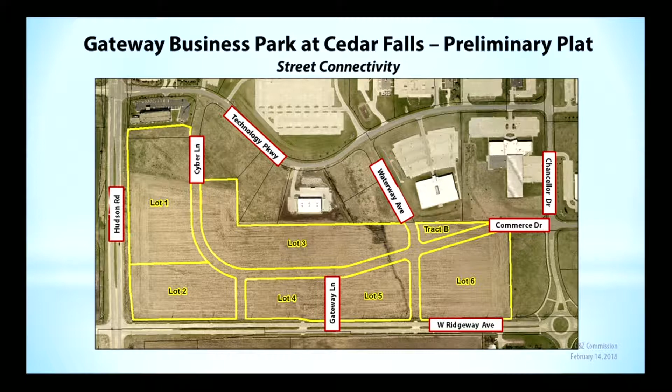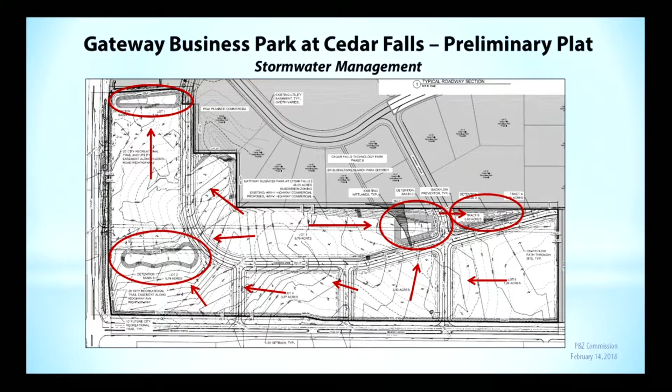So at this time, this is just a preliminary plat, which would get them started on some of the road improvements. You'll see later in the agenda a site plan for one of these lots for a hotel development. At this point, it would be staff's recommendation to approve this preliminary plat.

One thing we are working with the developer on is those access points along West Ridgeway Avenue, looking at the possibility of doing roundabouts at one or more of those intersections. Right now they're shown as full access intersections. If a roundabout is determined feasible, we might need some additional right-of-way. We haven't gotten to that point yet, but that's something we are studying. So if we do need additional right-of-way, we'll do that before this plat moves on to City Council.

Any immediate questions? What's the reasoning for thinking it may need a roundabout, or why is one preferred? It doesn't look like it's really a necessary item, just from my looking at it.

I think it's just looking out into the future. We're trying to look at the future roadway. The city owns all that land to the south, which we would like to develop sometime in the near future as well. So we anticipate this corridor to become a busier road network, almost like a University Avenue, so we're looking at, with the access the city may need into their lots to the south, does a roundabout make sense?

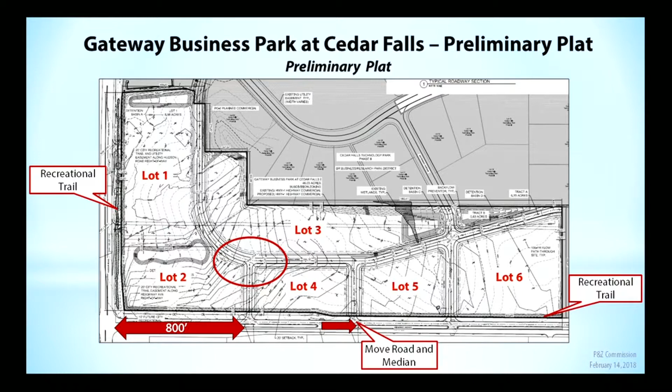On this slide, where I have the circle between Lot 2 and Lot 4 - back last month when we introduced the plat, that intersection was shown about 150 feet further to the west, and there was a roundabout there. Because they had to shift that east due to the city engineer's recommendation on that street moving further, they decided to go with a standard intersection at that location.

Okay, all right. I'll ask if there's an applicant present, if they would like to address the commission at all. We'll then open it up if there's anyone who would like to make any public comments on this item. Seeing none, any other questions, comments from the commission? Further discussion?

I'd make a motion to approve. There's a motion to approve. Is there a second? I'll second. There's a motion and a second. Let's go ahead and vote. We have all ayes. That item is approved and will recommend approval, and it will move on to City Council.

Moving into our new business agenda items. Our first agenda item is regarding the CBD overlay, and Carol Lilly from Community Main Street. Hi, thanks for having me.

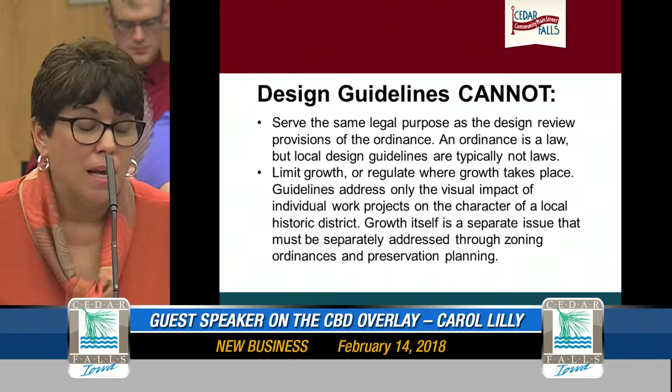Guidelines cannot control how a space is used when it's built. They deal only with the exterior, publicly visible portions of buildings, not with how the interior space is laid out or used. The guidelines cannot guarantee that all new construction will be compatible with the historic area, or guarantee that creativity essential to good design is used to be sensitive to the environment. And they cannot guarantee high-quality construction.

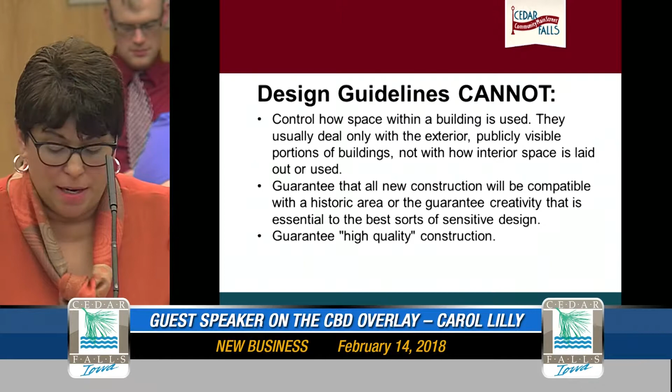As you update the overlay ordinance, I encourage the Commission members to consider how the guidelines have helped shape our successful downtown.

Updating the ordinance can remove confusion by specifying which categories of information must be used and which are only advisory. Community Main Street remains committed to working with city staff, community stakeholders, both big and small, and the citizens of Cedar Falls to ensure that we provide a business climate in which all aspects of our business mix can thrive. If you have any questions, I'd be happy to answer them, but just want to be a partner in continuing to help with the overlay ordinance process. So, thank you.

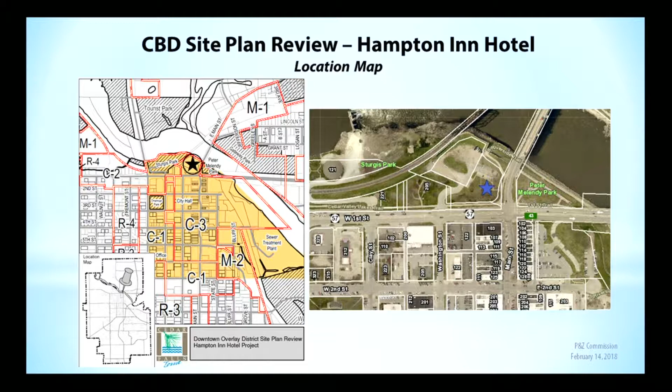Thank you, Mrs. Lilly. I'd like to introduce this next item. It's for the new Hampton Inn Hotel project at the corner of Main and First Street, where the old chamber site building is located. Basically, this is a downtown overlay district. We look at site plan review elements, building design elements, and other features relating to this site. The property is in a C3 commercial district, at the northwest corner of Main and First Street.

Just want to start with a little background on this site. It was the old broom factory. It was demolished in the winter of 2008, early 2008. At that time, the property owner ran through a couple ideas for a mixed-use building at that site, shown in the upper left corner of that picture on the slide there. They had plans for Riverview Gardens, a 5 to 6 story mixed-use building.

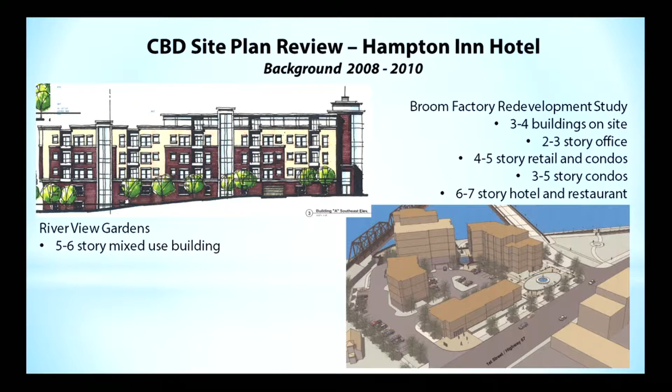I think Mr. Holtz was on the commission at that time. We ran that through a couple times and really didn't act on it. We tabled it in the spring of that year, and then the council took on this project and hired a consultant out of Madison, Wisconsin to take a look at this 2-acre site to see what could go on there. We did a quick little study on that, shown in the lower right-hand corner of this slide. It showed a mixture of mixed-use buildings on this site from 2 to 3 stories of office and retail up to 6 to 7 story hotel and restaurant type features. So that was part of those planning documents back in that time.

Moving along the next couple of years from 2010 to 2012, as the State Street development property was underway and developing that master plan, the property owner purchased that site from the owner of the broom factory and amended that State Street plan, creating this Riverwalk redevelopment plan. The city entered into a developmental agreement with that property owner in 2012, which identified a couple more buildings there for townhomes and condos on that corner site down by the intersection - 3 to 4 story townhomes, and then toward the railroad bridge a taller building with a mixture of condos and other types of development. That worked its way through the early years of this development, about 4 years.

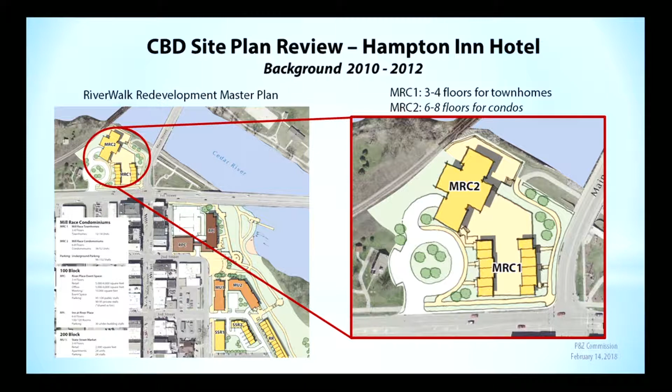Then moving along, Eagle View partners teamed up with Western Home to look at possibly another type of senior facility unit down there. They really looked at that site and eventually turned their focus to the south side of town, where we had the Jorgensen Plaza site plan review, which is under construction now. So they basically looked at moving away from that site, which brings us up to what we have here now for the proposed Hampton Inn hotel.

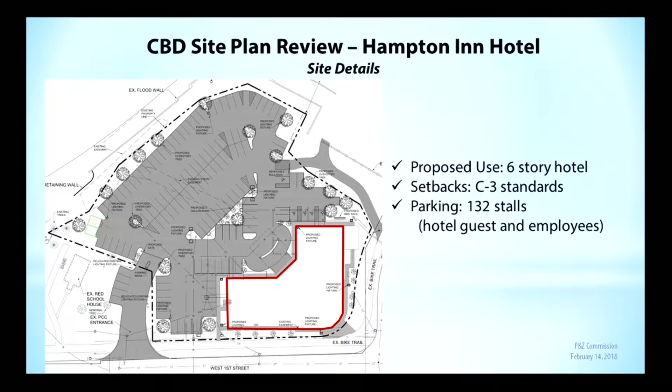The building is moved closer to that intersection - it's a 6-story hotel in the C3 district. It meets all the setbacks for that district, and also for parking. The parking is identified behind the hotel, up along the railroad tracks and the flood wall. They have 132 stalls with access off of First Street, which applies to how many guest rooms and employees there are, so that meets those requirements for parking. Moving along to some site plan elements around the site, we have the flood wall along the railroad on the northwest and around the north side of it.

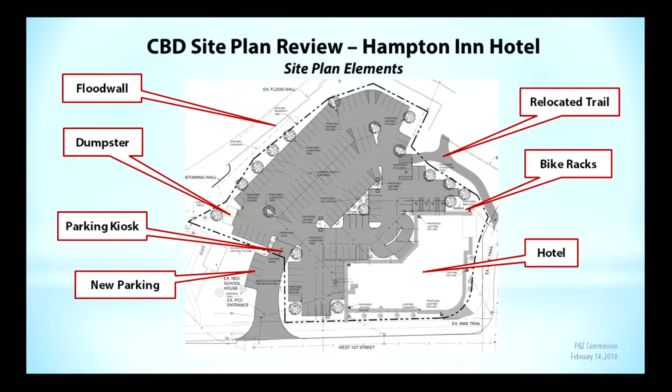The dumpster is located behind the Little Red Schoolhouse. The parking lot at the north end of that driveway will be accessed with a parking kiosk, so as you approach it you'll enter your information and they'll let you in, probably using a key card. Along the west side of that driveway there will be 5 additional stalls, not part of the hotel site, but tied more into parking for the Little Red Schoolhouse, added to the new driveway.

Moving along, the hotel is in the southeast corner of the site. Along the north side of the building, up along Main Street, there's a place for bike racks they intend to put in. Then there's the trail along the corner that ties in around the flood wall, with everything connected via trails and sidewalks into the site.

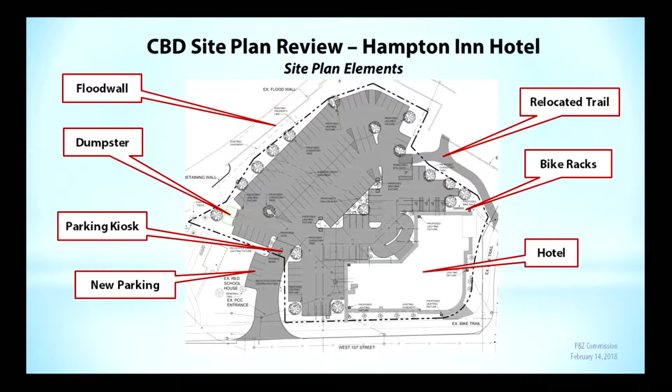Moving along with landscaping, we look at perimeter landscaping, parking lot landscaping, and screening from right-of-ways or nearby streets for this district. There are exceptions to the code when parking is behind the building and there are no adjacent properties to screen. That exception applies here along the flood levee, where trees on the northwest edge of the parking lot will be combined with a berm and a wall, so the wall becomes the screening.

Looking at the area along First Street, we identified a possibility of adding some shrubs. There are a couple trees on both ends of the parking stalls just east of the driveway, and we wanted to add shrubs there for additional screening along First Street. With that, the landscaping is satisfactory to the code, and there are other shrubs in parking lot islands around the lot and hotel site.

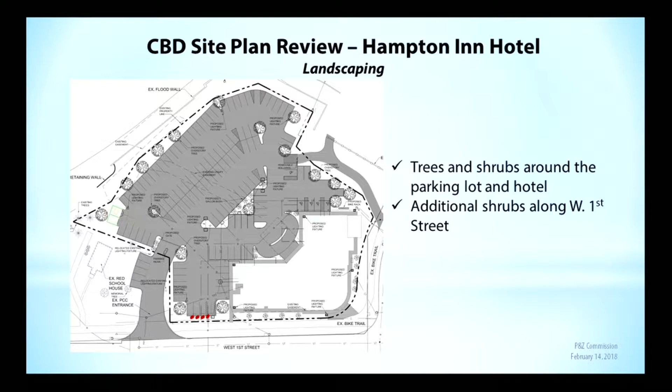Moving along to site access, the photo on the right shows the existing driveway, which curves into the old chamber site. As part of this project, they're going to change that driveway and straighten it out a bit off of First Street, as shown by the arrow. Since this is the only access to the site, the fire department requested an emergency exit.

That emergency exit is identified by the dashed line along the trail. The trail has to be reconstructed for the flood wall project, so the applicant will rebuild it wider with thicker concrete to support emergency vehicles if needed. Basically, a fire truck would enter the site but have no way to come around and exit onto First Street.

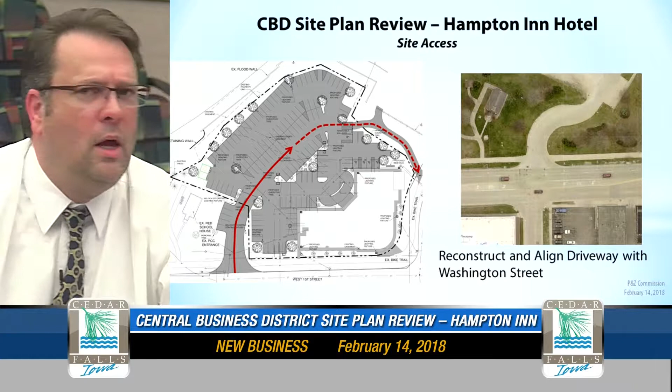So the idea is to install removable bollards at the edge of the parking lot where it ties into the trail, keeping that access closed until an emergency occurs. If a fire truck blocks the driveway, this will allow other people to exit the site in that situation.

Moving back to the driveway along First Street, the petitioner will rebuild it, and our recommendation is that the driveway be shifted a little to the west so it lines up better with Washington Street. On the previous aerial you can see the north side is a bit offline, so we want it moved west to line up properly, and since they're rebuilding it anyway, we want them to make those arrangements during construction.

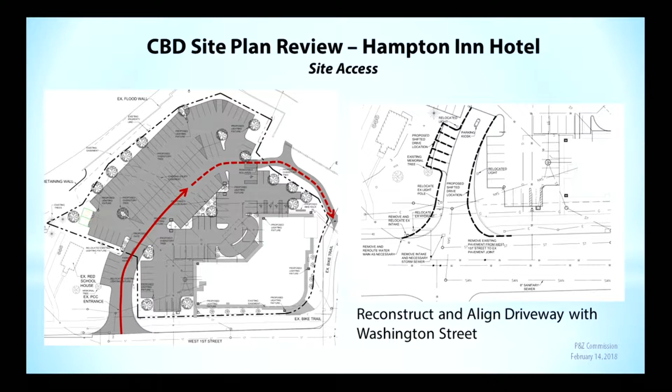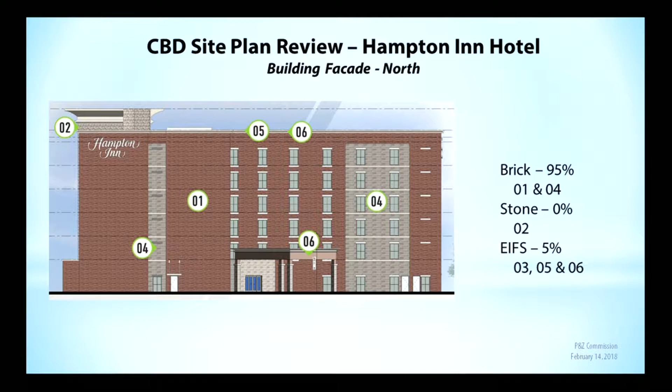These are the perspectives of the proposed hotel. The bottom picture is facing the corner at 1st and Main, and it has a nice little corner feature, a curved feature, where you'd have a pedestrian entry in the corner that accesses the rest of the parkade area.

They provide a nice contrasting color for the bricks and other materials. The raised and recessed facade treatments really pop out to identify those different colors. The windows have precast lintels above each window, sills, and horizontal banding at the bottom of the windows. The parapet is topped with a cornice feature around the top of the building.

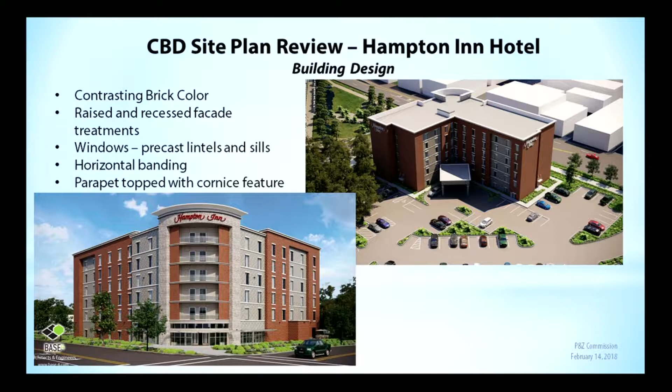Again, the back of the building, as you enter the parking lot, there's the canopy there for the entry.

The architect provided a height analysis of this building in relation to the other buildings in the downtown area. The general height of the building is roughly 69 feet, that's the top of the parapet wall. If you go to the top of that turret it's a little bit higher, but in general I'd say it's 6 stories, 69 feet, and the other buildings are generally 4 to 5 stories, as depicted here - you had the Oster Theater, Black Hawk, and the River Place.

Just outside the pictures, the Joker's building or 4th and Main building is similar to the Black Hawk Hotel. So on average, this is roughly 14 feet taller than the hotel. It does kind of go back to that Riverview master plan I mentioned earlier about a potential 6 to 8 story building on that site, so it follows that with a hotel idea for that corner.

Just moving along with site lighting elements, the LED lights are identified in red. Those are identical to the lights that were put into the 100 block parking lot behind the 100 block on Main Street, the new one.

The petitioner plans to add some antique lights around the building and run it down First Street, which ties into the streetscape plan we have downtown on First Street - a series of single head antique lights from the Little Red Schoolhouse west to Center Street in front of the Ice House, but then there's nothing really from the driveway down to Main Street. So 2 additional lights will carry that plan through.

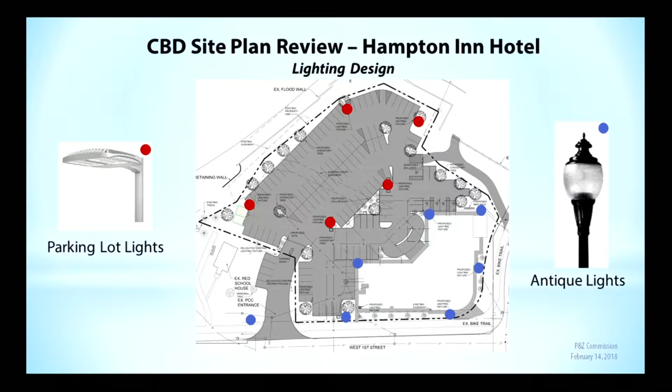The existing driveway has 3 double headlights, and those lights will be removed and replaced as part of that driveway change. So that carries through with the streetscape plan.

Just want to go over what's going on with the levee. The wall there is along the railroad and the north side of the site. The levee project is underway right now, and they're adding additional height to the existing wall features, wall structures, and earthen berms along the south side of the river.

Essentially it's going to be 2 additional feet for that wall height, I believe, so it'll protect for larger flood events, from 100-year to 500-year flood events. Right now we have an existing easement there for the site to store materials, stage materials, and I believe that runs to the end of June. So the idea is for the contractors to get in there and get out by that time.

Later in the presentation, Iris is going to talk a little bit about the chamber building relocation. In the spring you'll see a lot of activity down there - I think there's some stockpile material down there now.

So the idea is get that buttoned up when the chamber building leaves, and then if the hotel is constructed at this site here later this spring and summer, once that's done, the hotel again will come in, their grades will match the existing.

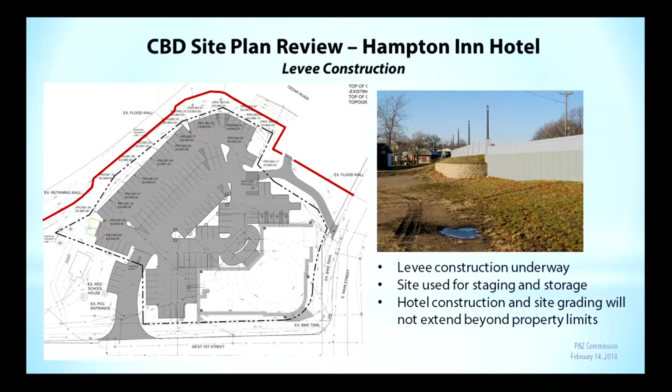We don't want them to mess with the toe of the berm. It's a berm there on the back, as you can see on that picture, that goes up to the wall. So that will all be graded out, and there's a couple tenths of grade difference between the back sides of the new parking lot to the existing grade, and that could be blended in. There's roughly 15 to 25 feet of green space north there between the edge of the parking lot and the wall that will work out very fine.

Moving along to stormwater management, everything's going to be underground here as part of the parking lot design. There's going to be some inlets installed, and that will collect all the parking lot runoff and the roof drains, so you'll see the arrows go into all those inlet structures. The dotted dash lines indicate the underground flow of the stormwater, and eventually it'll go into a water quality control system that catches all the debris, filters it out, and then that will be released into the storm sewer.

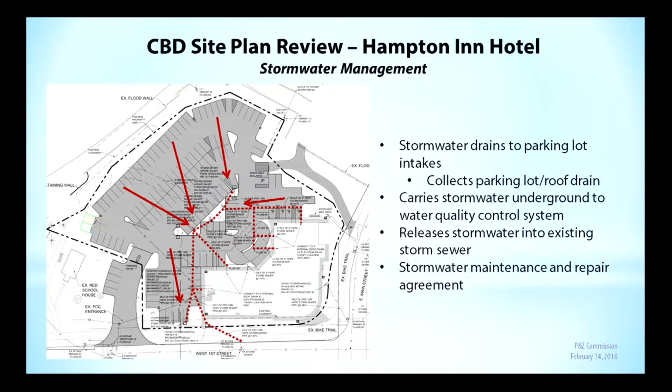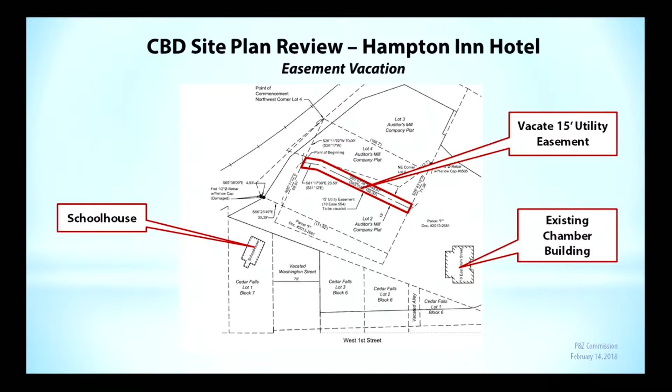Easement vacation - seems like a lot of these projects lately, we've had site plans that involve easement vacations - there's a utility easement that runs through the middle of the site. As you can see in relation to the schoolhouse and the existing chamber building, it's a 15-foot wide easement that will be vacated. I believe Mediacom's the only utility in this area, and they've been notified, and they have plans to move that utility in anticipation of this construction. So we'll have to vacate that easement as part of this project.

So basically wanted to hear your comments and just introduce this. We have the applicant and the engineer here for any additional comments, but want to hear what you guys have to say, and then just a couple other stipulations - again, the additional landscaping along First Street, and give us an idea of what the dumpster enclosure looks like. If you remember on the site plan, that's behind the Little Red Schoolhouse. We'd like to have an enclosure plan to maybe match the design, materials, and color of the building.

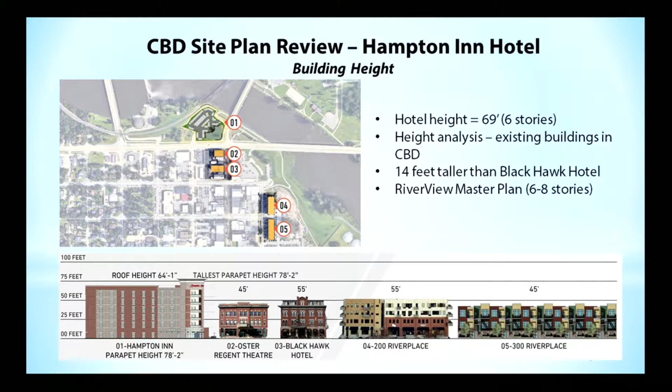So 14 feet is going to be pretty distinctive and is really going to stand out, but 14 is probably not over the top. If you look at that, that's kind of the roof height, then you add the parapet wall to it, which adds a little more height.

It does have the distinction of being across the street from the main downtown, because First Street's a bit of a barrier as it goes through there. Yeah, it lengthens Main Street for us. I like that.

So the customer drop-off point isn't on Main and First, it's around the backside where that canopy is. That was one of the first ideas, possibly having a customer drop-off on First Street. We looked at that location, the distance from Main Street, and it being a DOT roadway too. They changed their plan to come in behind the building for that canopy drop-off area. But that works its way through the lobby up to that corner on Main Street, as a pedestrian flow to make that connection down to the parkade. So vehicles would go around behind the building. That's not a very good place to stop.

In regards to discussions of using the river for more recreational purposes, and certainly having the hotel here would be beneficial, are we taking that into account with the site plan for what we might, as a city, as a community, want to be able to offer for recreation regarding the river?

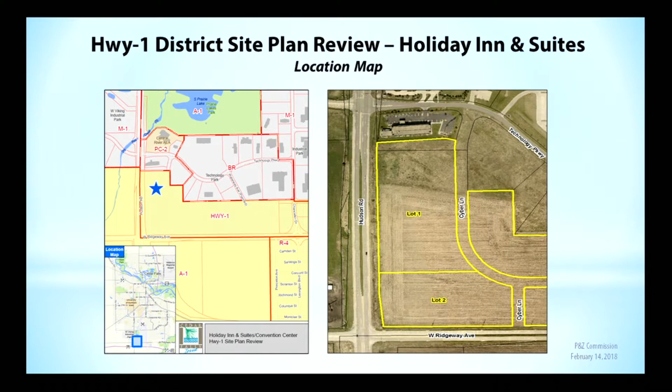This was in relation to the first item on the agenda, the Gateway Business Park plat. So this is a site plan now for Lot 1 of that plat, which would have frontage along Hudson Road and Cyber Lane, just south of Technology Parkway. This property is zoned Highway 1 district, and it's also located within our Highway 20 Commercial Corridor Overlay District. The site is about 9 acres in size, and they're proposing a 4-story, 126-room hotel with an attached 31,000 square foot conference center.

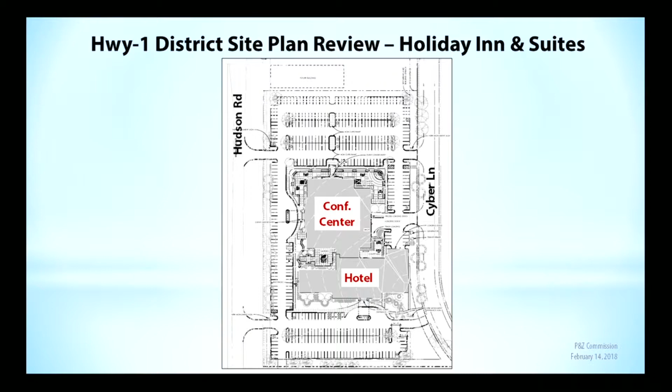Looking at the site plan itself, we've got the hotel on the south side of the property, and the conference center on the north side - 31,000 square feet, 4-story hotel. You can see some of the site elements here, starting with the upper left: they are showing room up on the north side of the property for a future hotel, and additional parking stalls - 76 parking stalls at the north side of the parking lot - for that future hotel.

There is a recreational trail, as was mentioned during the preliminary plat, along Hudson Road, with a trail connection down at the southwest corner of the property so you can easily get off the recreational trail and enter the site instead of having to use the driveway. The conference center's main entrance will be along the west side of the building, and the hotel's main entrance will be on the south side. Both will have drive-up canopies.

There is a location for bicycle racks on the west side of the hotel, near that trail connection, so it blends that together with a spot to park your bicycle. There's a typical 5-foot sidewalk along Cyber Lane, required per the subdivision ordinance. The trash dumpster is going to be located inside the conference center building, with an overhead door on the east side that will have the trash enclosure within it.

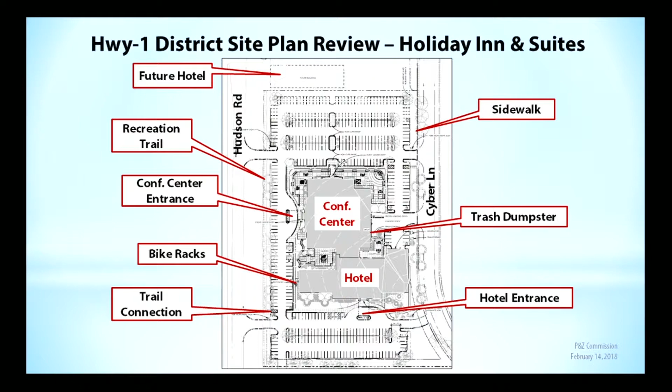Looking at some of the design criteria for the Highway 1 district, for landscaping they are showing street trees along both Cyber Lane and Hudson Road, as well as trees within and along the perimeter of the parking areas. It's hard to tell from this plan because it's such a large site, but they're showing numerous trees, shrubs, and perennials around the hotel and conference center, with larger shade trees in the parking islands. They are meeting the site points for landscaping and open space - the ordinance requires 15% of the lot area for open space, and they're showing about 16.5%. So both requirements appear to be met.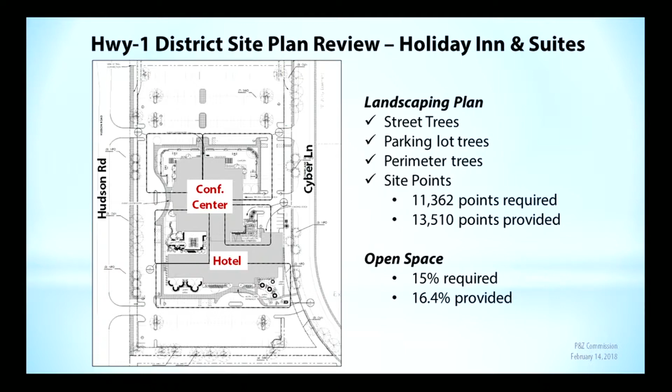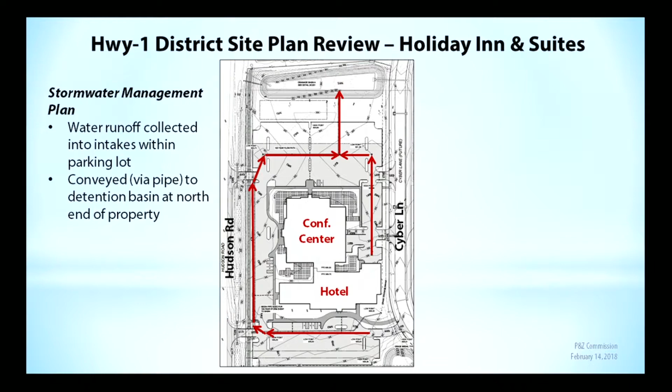Stormwater management: water runoff will be collected via intakes in the parking lot. The roof drains will empty out into the parking lot and then be carried. You can see how these arrows work. Everything will be moved from the south, collected along the west side, and piped to the detention basin at the very north end of the property. So everything will be collected on site and run via those pipes to the north side into that regional detention basin.

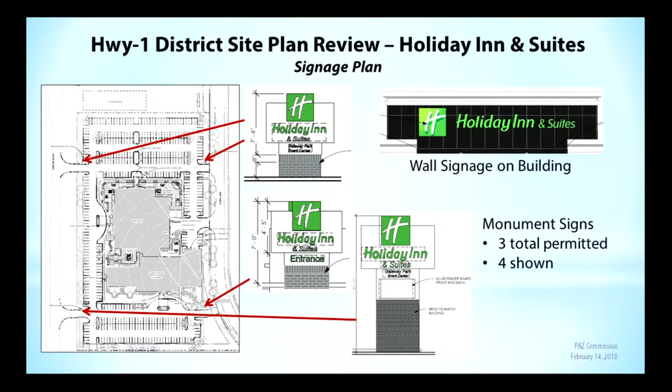It's going to just have the hotel logo up at the top of the building, which would appear to meet the sign guidelines for a wall sign. The two entrances off of Hudson Road will have a 100-foot turning lane. It's not a deceleration lane, but there will be a 100-foot turn lane for traffic to get off Hudson Road and slow down to get into the site. That will be something the developer will install with these accesses from Hudson Road.

At this time, staff just wants to gather comments from the commission and continue the discussion at the February 28th Planning and Zoning Commission meeting. We'd like to review the signage plan for conformance with the Highway 1 overlay zoning district requirement of only allowing 3 signs - they're showing 4, so we'll want to work with them on reducing that. We also want to gather any comments the commission may have regarding the design of the building, and any other comments or direction for the developer.

Thank you. Is our applicant present? Would you like to address the commission? Please come forward. State your name and address, please.

Atul Patel, 307 Winding Ridge Road, Cedar Falls.

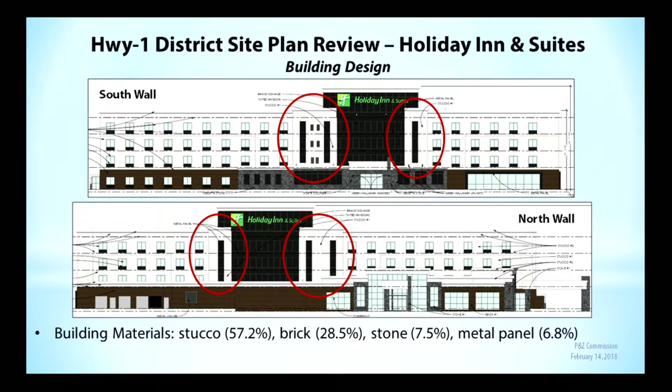Shane, if it's possible, could you bring up the image with it in front of us? She referenced maybe the colors not being clear. Can you go to the perspective? That one. So what you're not seeing is, can you come back up? Thanks, Stephanie was trying to tell me. I didn't see the finger. That's the finger. So on either side of the building, you can see the cornice that's running and forming.

The cornice that's running from the west side of the building, yeah, that one right there. So all that underneath there is actually more of a tan color that's not coming through at all in this rendering. And then also on the other side of the main entrance is also that tan color. It's not nearly as monotone as this, it's two-tone above the brick. And then those cornice parts are actually, one is proud of the other.

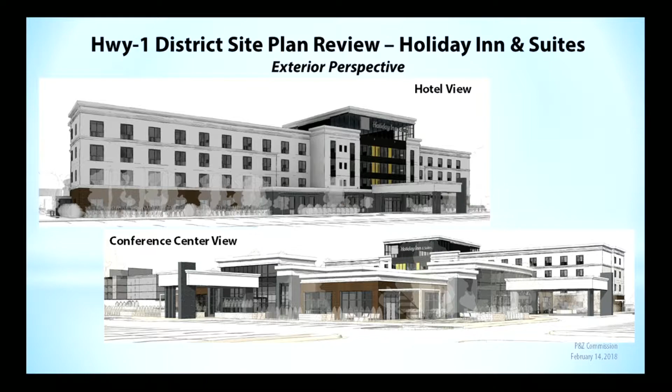So I have a question, you're talking about the columns on those two cornices, is that what you're bringing up, Shane? Right, just on each side of the glass feature at the front, you can see it protruding out, so it was just a comment from staff as if they could maybe do something with more brick or stone on that to kind of enhance the feature of the main glass portion of the building.

Looks like a good project. Thank you.

Well, obviously this is the first thing you're going to see when you come into Cedar Falls, and it looks like the pictures we've got show it's going to be a substantial building. I guess if we're worried about the renderings, perhaps next time if we're looking at this in a little more detail, if there's something you want to show us that might reflect this coloration difference a little clearer, that might be okay. But it looks like a very substantial and significant investment coming into town, so it'll be the first thing we see.

I love it, so. Yep. I'm glad to see something out there more than a cornfield. Yeah, and I've been on that land a long time. I was a kid living on that farm, seven years old. That's a long time ago for me. So I'm glad to see it. Yeah, it's a good spot.

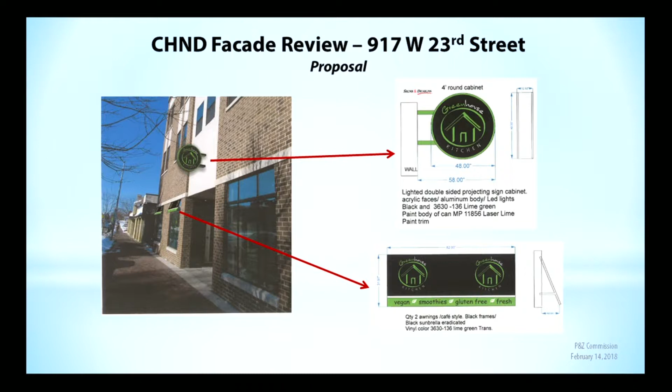The College Hill neighborhood did review the request and had no objections to it. And with that, staff is recommending approval of this proposed request for the projecting sign and the multiple awnings on the site.

Thank you. Is there anyone present who'd like to speak to this item? Bring it back to the commission for any questions, comments, motion.

Motion to approve? Second. There's a motion and a second. Please go ahead and vote.

And we have all ayes on that item. That item is approved, and we'll recommend approval forward on to the City Council.

Next item in new business is the Central Business District Site Plan Review for the Chamber Building relocation.

Ms. Lehman. Yes. So we talked earlier about the proposed hotel project at this site. So for that development, the Chamber Building would either need to be relocated or demolished.

So Community Main Street is proposing to relocate the building to the southeast corner of the River Place development near the entrance to the water reclamation site by the river trail.

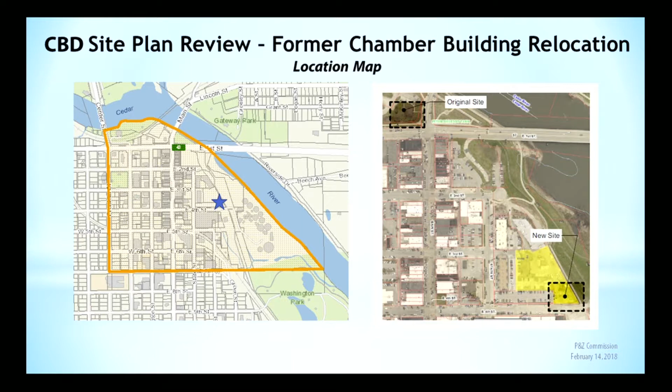So just a little bit of background on the site before going into the details. As I mentioned before, this is part of the River Place development site plan that was approved.

So these are elements that we'd be looking at for consistency's sake to continue on into the proposed project, so the landscaping and the parking. Those are where those elements would come from, those comments that you'll see in the future. But again, the building would be located here on this existing site.

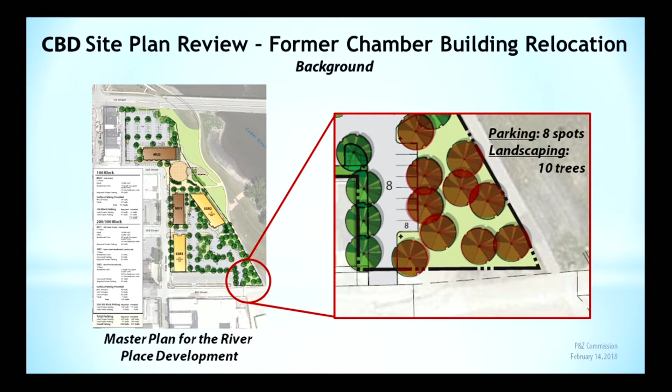So jumping into the details of the site plan, as mentioned before, it is proposed that the building would be moved from its current site and set on a new basement at this new location.

Community Main Street is also proposing to add a garage to the north side of the building, and this would be for storage of their materials and for their gator.

The elements that need to be reviewed for a site plan are outlined on this slide, and I'll just quickly walk through each of those. So office is an allowed use within the C3 zoning district, so there's no concerns in terms of that.

The setbacks - there are no setbacks in the C3 zoning district, so the placement of the property is fine. In terms of parking, in the downtown, office buildings and commercial buildings are not required to provide parking.

But because there were 8 spots on the site that were proposed and approved for the River Place development, those 8 spots are required for consistency. So they are proposing 8 spots, but because they're now placing a building there to meet ADA requirements, we do require 1 handicapped accessible parking spot for access to the building. So that one change will need to be met to be ADA compliant.

In terms of landscaping, as noted before with the master plan, there were 10 trees originally shown on that site. They are proposing 2 trees at the entrance of the site, one along the trail on the east-south corner, and arborvitae along the trail in the north to screen the utilities on top. Potentially those 6 plantings could count toward the landscaping count. The arborvitae would have to be a certain size, but that would be an additional 4 or so plantings we'd like to see on the site.

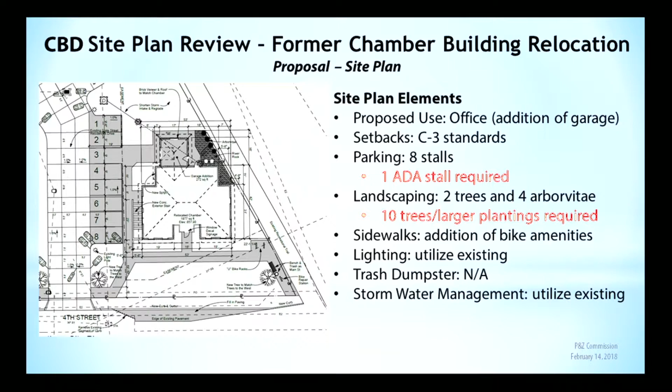The first two I'd like to talk about are the materials and color of the building. It's actually interesting - when the building is moved, they have to take off all the brick for that move and then put it back on at the site. So what they're proposing is not reusing the existing brick; they'll be replacing it with brick of a similar material, but with different colors that will better match the more red tones of the buildings in that area.

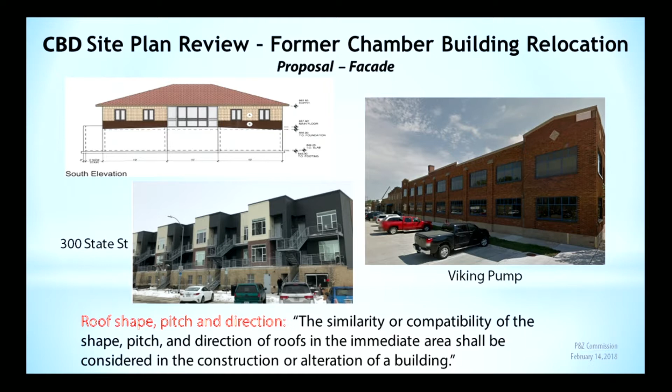The two buildings in comparison, Viking Pump and 300 State Street, are both flat roofs. But the applicant has provided a number of images of existing pitch roof buildings within the downtown overlay, and a map showing where they're located in relation to the proposed site. Those are the dark blue or black diamonds shown on that map. I added the dates of when those buildings were built for reference. The design criteria were put in place in 2004, so all but two were built before the design criteria were approved as part of the ordinance.

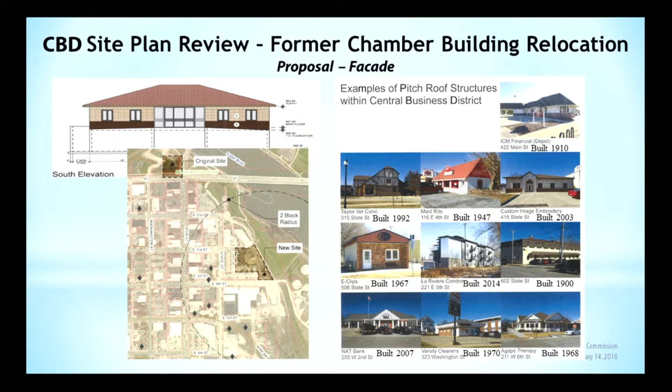Moving on to pattern, this section looks at the ratio or breakup of windows versus what they call solids, just walls. The building's elevation along the south side, East 4th Street, the south elevation, does have a number of openings with windows and doors. However, this pattern is not carried around the other sides of the building. The north and east elevations especially are mostly all wall or solid.

These two sides are also right next to the recreational trail, as close as about 7 feet away, some even closer, so it's very, very visible. Staff would like to see more openings along the other sides, especially those two. So something else again to consider for discussion.

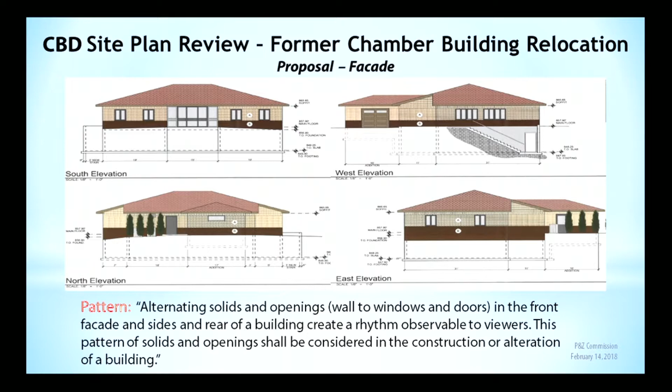Lastly, architectural details or features, which considers the architectural details of the proposed building compared to other buildings in the overlay. The proposed building will add a horizontal band or wainscot of brown brick to the base, providing a break in color and visual interest. The adjacent buildings, both Viking Pump and 300 State Street, use vertical breaks to create the illusion of modules, but this tactic is more meant for larger buildings, so it may not be necessary for a building of this size.

The windows themselves, there is an update from the staff report for this. They will not be carrying over or using the sills of the original building, so those will not be included in the design or reused. It'll be pretty much just the wainscot and the windows put back in.

Just for reference, in looking at the buildings downtown, 415 State Street shown on the right was the closest I could find to what was being proposed, and there are a number of architectural features included in that design. So staff feels that some direction on architectural features, we'd like to get your opinion on that moving forward.

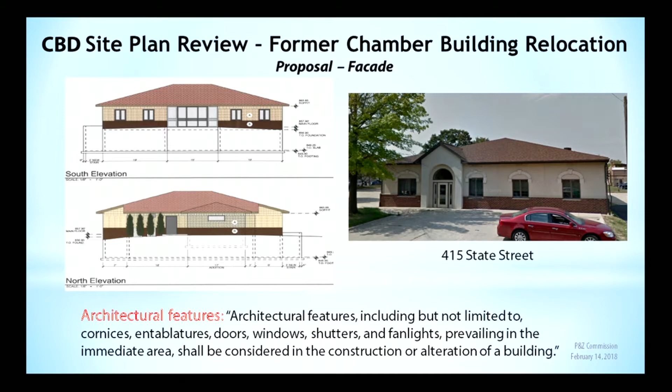In summary, this is an initial discussion of the project, and we're seeking direction on some of our thoughts and what the code states, and then we'll come forward hopefully at the next meeting with updates.

I believe Carol is here, so she will be able to answer any questions you may have, or may have additional comments too on the design.